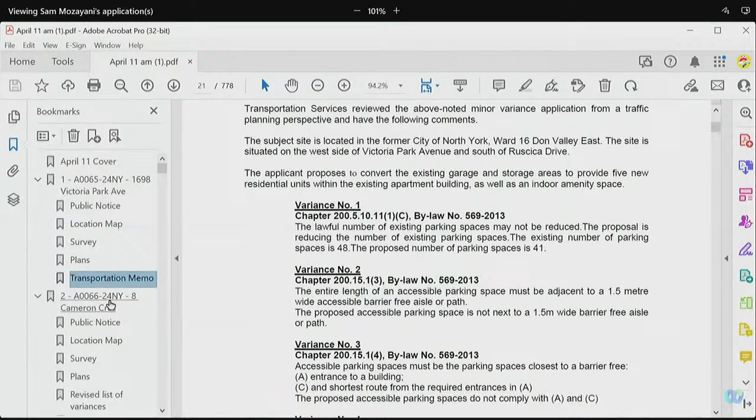Mr. Chair, we're having an issue reaching the agent at this time. If you wouldn't mind, why don't we move on to the next item? Okay, so we're going to hold item number 1. Let's move on to the second deferral request, 252 Florence Avenue.

Through you, Mr. Chair, that's in the afternoon. Do we want to leave that to the afternoon? Okay, so let's move on to item number 2.

8 Cameron Crescent. Give me a moment here.

The purpose of the application is a proposal to add a 2-story addition, deck, and make alterations to the existing detached dwelling. We've got variances for side yard setback for a covered front porch, driveway width, front door height, lot coverage, building length, FSI, east and west side yard setbacks, eave projection, building height, side exterior main wall height, front yard landscaping, front yard soft landscaping, and vehicular entrance height.

On file, I have material from the applicant as well as a memorandum from transportation and a staff report from community planning. Do we have the applicant with us?

Good morning, Mr. Chair. Good morning, Members. I'm Evangelista on behalf of 8 Cameron, 53 Bentworth Avenue.

Thank you. Staff, can you hear the agent? If you can just speak up a little bit for us. Oh, sure, no problem. Just give me 1 sec. Thank you. Is that better? That's better.

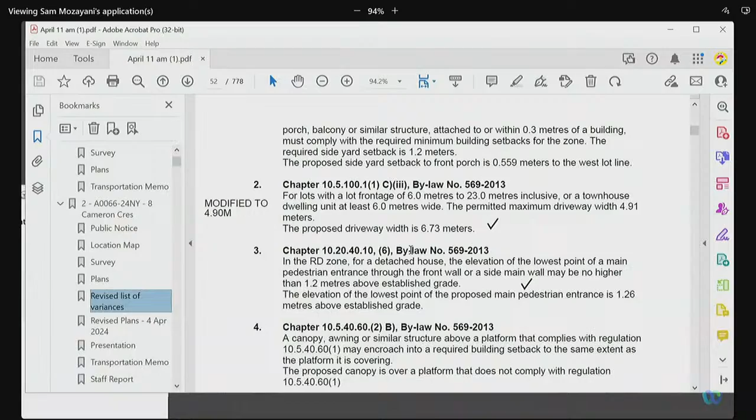The next variance that we have amended is variance number 12. We've amended that to 7.45. We did a further amendment - I believe the modified list that you have states 7.50, however, in further discussion with planning, we have amended it to 7.45. Variance number 13, we have increased the front yard landscaping to 46.74%.

Okay, variance number 14 has been removed as we now comply. Variance number 15, Mr. Chair. Yes, which doesn't seem to match what we have on the screen. I just want to clarify that we are noting the correct variances.

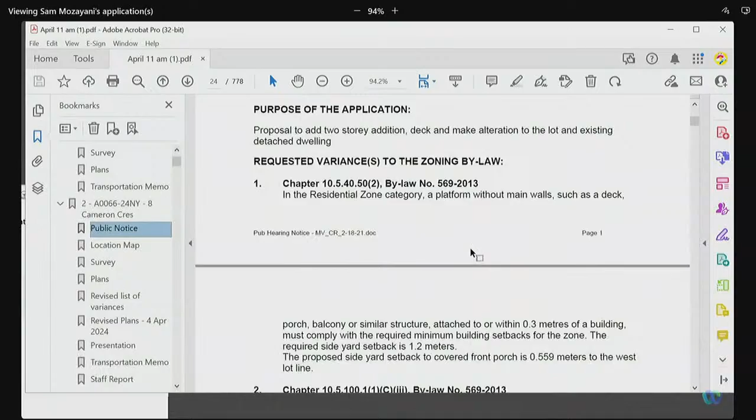I believe variance number 12 is your specific concern, I'm assuming. So variance 12, I believe is not 7.5, and I'll have the agent confirm, but I believe the modification is, if I heard correctly, 7.45. You are correct, Mr. Chair.

Okay, and I believe, sorry, you're saying variance number 14 has been removed. Sorry Mr. Chair, can I just have them repeat what is the change to variance 12? 7.45 meters.

Am I looking at landscaping? Which is consistent with the planning comments in the staff report. We're just going to bring up on the screen variance 12, which we have as landscaping.

Why does my public hearing notice differ? Let's just take a minute to see if we can identify the discrepancy here.

Can I, through you Mr. Chair, to staff, to Simon - the modified planning notice that I submitted - through you Mr. Chair, we can only use the public notice that was mailed when we go through changes. That's the only one we should be using as reference.

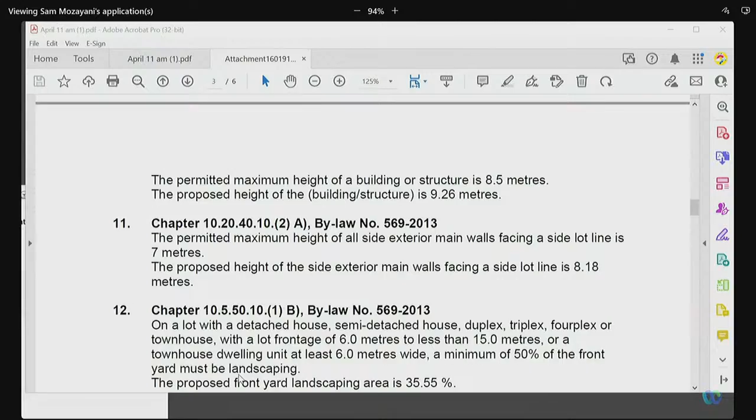2400, 2430, 2434, 2440, and 2444 Yonge Street, as well as 35 Roselawn Avenue. The purpose of the application is to alter the development standards as approved by the site-specific zoning bylaw 1207-2022, including changes to the tower heights, gross floor area, and parking space lengths. The southern tower will increase from 101.2 meters to 110.1 meters, and the north tower will increase from 83.2 meters to 92.1 meters. Variances include FSI, height, and the minimum length required for up to 4 parking spaces.

On file I have materials from the applicant, comments from HPS, a memo from Engineering and Construction Services, and a letter from the local councillor. I also have a late staff report from Community Planning. Do we have the agent with us?

Mr. Chair, my name is Michael Goldberg. I'm the planning consultant for the applicant. Okay, Mr. Goldberg, and your address? Goldberg Group, 2098 Avenue Road, Toronto, M5M4A8.

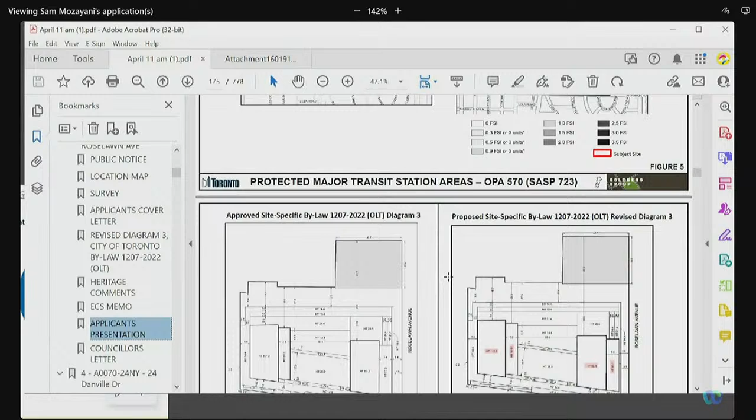If you look on page 7 of my presentation, that drawing is attached on the right-hand side, but it is on file with the committee as well. So if you go to page 7 of the report, on the right-hand side, in the bottom left-hand corner, it's dated January 26, 2024. That is the request we have attached to your decision.

Okay, and you're aware of the staff report from Community Planning? Yes, sir. I've read both community planning, the transportation, the local councillor, the next door neighbor, and we understand that the Ratepayer Association is also happy with this application.

I also see some correspondence from Engineering Construction Services. I see no further comment in their notes. I'll have to just mention to my colleagues whether or not there's any specific condition that they may require. Yeah, it seems like they're satisfied. If there's nothing else to discuss, we don't have any other questions. I see no other questions.

We are ready to move this into committee. Yes, and I do note the late staff report from Community Planning. Any discussion, comment, motion?

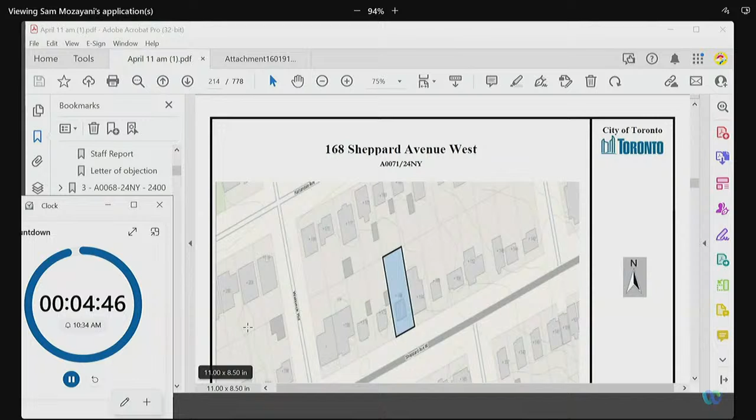Yeah, I have one thing. I would like to make sure of the veterinary use for the property. Basically zoning bylaw 7625 says that veterinary clinic means professional office as the definition of veterinary clinic. The zoning bylaw also says veterinary clinic operated by someone licensed under the Veterinarians Act. What if we don't have a boarding kennel in the clinic, only providing medical care to animals? I just want to know if it's possible.

Are you asking a question? Can you repeat the question for us? What if we remove the boarding kennel in the proposed clinic, and only provide medical care to animals? So my understanding is you disagree with the comments in the staff report?

Just one thing, and for the second floor, I will change it from residential use to the permitted other use. Do you have any questions? I just want to know, the veterinary clinic won't have any boarding kennel, but in this case can we approve the zoning bylaw? So if I understand correctly, you're putting forth that because it's not being used as a kennel for overnight boarding, you think the use will not impact the particular allowable zoning.

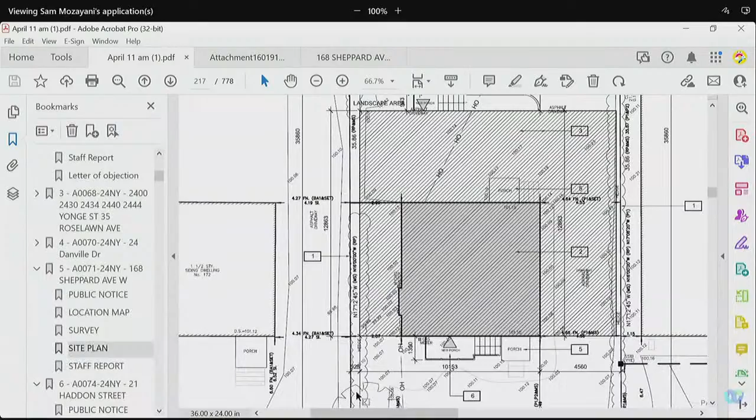So you've heard the agent speak on behalf of your neighbors. I'm going to turn it back to you and provide you an opportunity to comment on some of the things that he's put forward. Is there anything you'd like to add? No, I haven't. Okay, anything else? That's fine. Do we have any questions? Any additional questions before we head into committee?

No, I was wondering - I really wanted to hear what the applicant would reply to the opposition, but... Are there any specific questions you'd like to have the applicant elaborate on? I want to also make sure there's enough communication back and forth that everybody understands. Thank you, Mr. Chair. I wanted the applicant to comment in terms of the staff report - I understand there was conversation about the argument that a medical office is there. But in terms of the zoning bylaw, like the opposition mentioned, I'd like to hear this from the applicant, though it's up to the applicant if they want to reply.

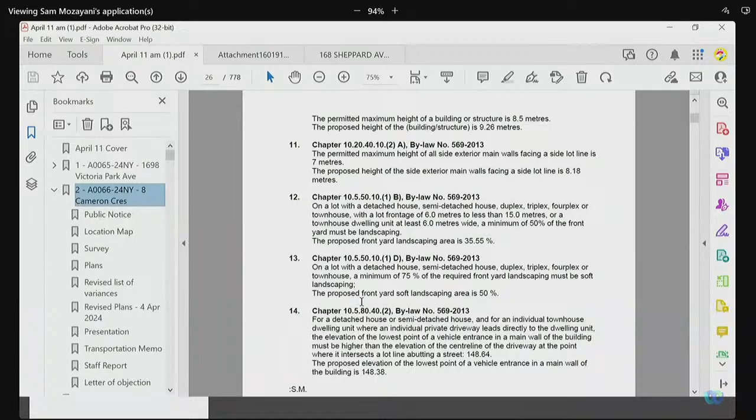So now variance number 2 has been removed. Okay, thank you. Just for the driveway width, if you can just read it, so we make sure we've got the right variances — for the driveway width, we're removing it.

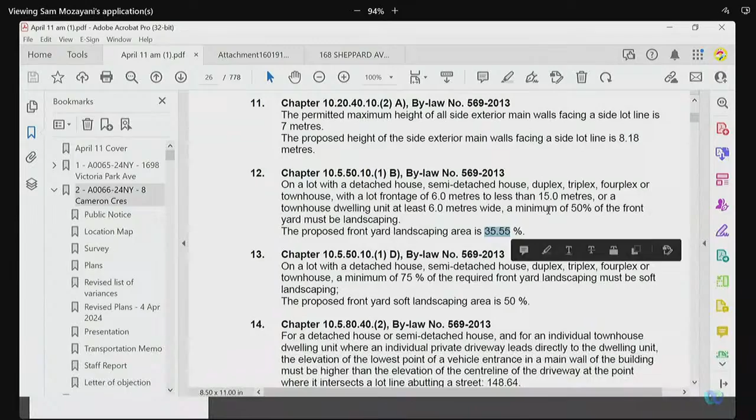Correct. Then let's move on to variance number 11, the proposed sidewall main height is now 7.45 meters. Okay. Variance number 12, the proposed front yard landscaping area increased to 46.74%. Is that correct? Correct. Okay, thank you.

Variance number 13, proposed front yard soft landscaping — that variance has been removed. Okay, very good. Variance number 14, the proposed elevation of the lowest point of a vehicle entrance, also removed. Okay, very good.

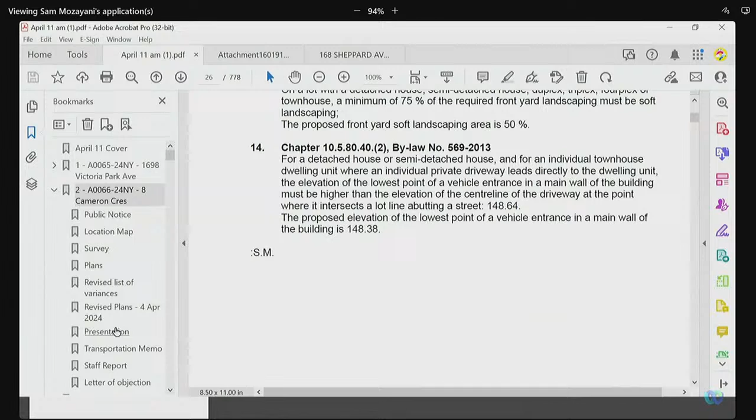We got those amendments? Yep. Okay, thank you very much. Okay, great, just give us a moment. I'm going to ask my colleagues if they require a presentation from you at this time. But we do have speakers, so perhaps a brief presentation would be appropriate.

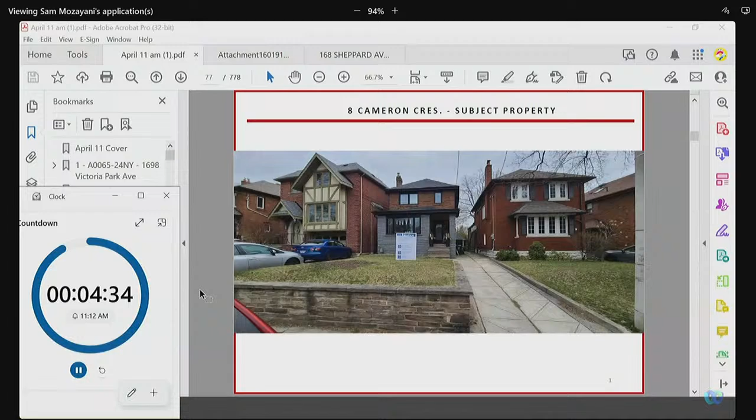So the subject property that you have in front of you, the west wall will be remaining. What the owners are proposing to do is an addition at the rear and at the side of the home. The comments made by Transportation no longer apply, as we have removed those 2 variances that they referred to. We do have a side yard setback on the west side, which is existing, and we've actually bumped the house in at the back where we're proposing our addition, which in some points is 0.91 meters, opening up to approximately 1.23 on the west side.

On the east side, we also have a side yard setback, with pinch points along that east wall. However, there are areas where it does open up to 1.19 meters, just shy of the permitted 1.20 meters. So let's talk about coverage — for this particular house, we are asking for a coverage of 39%, which includes the rear deck area, but the house itself is approximately 36%, which I believe is not far off from the 35% lot area.

And as I mentioned, it relates to the other areas at the front of the house, the porch, and the deck at the back. Our building length has been taken from that front canopy to the rear yard.

As you see, if you refer to my submission, page number 3, where I've outlined all the variances relating to the side yard setback to the front porch, the setbacks on the west side and east side, and the length of the dwelling.

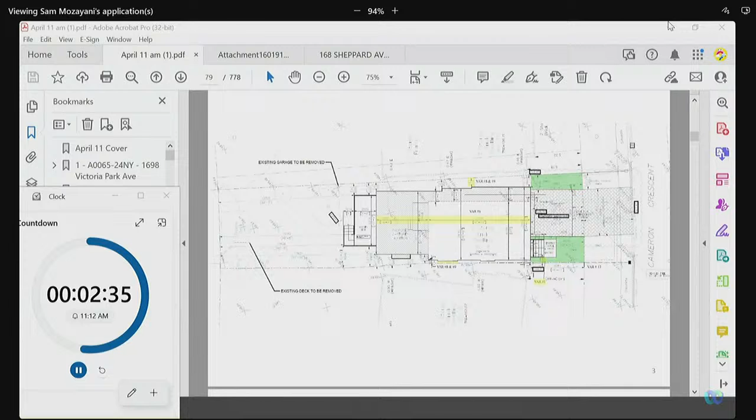We have reduced the main wall height to 7.45 meters, which is more in keeping with what is existing in the neighborhood. Our landscaping has been increased.

This does not differ from what we currently have, because as I mentioned, we are altering the home that is currently there. We've worked quite closely with planning staff to make the changes, and they are amenable to them.

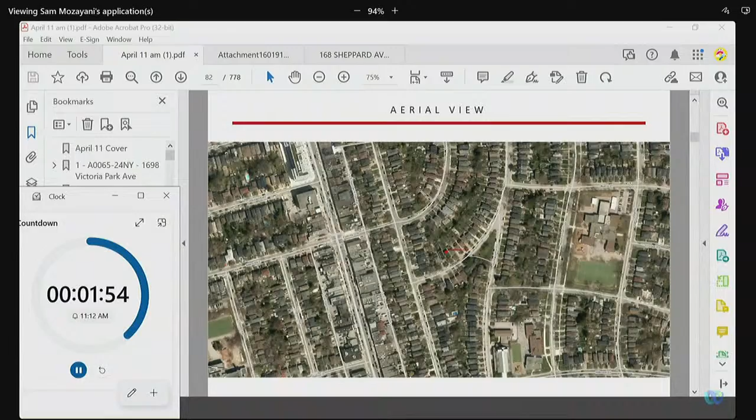I am in receipt of the Leaside Residents Association letter. They make a reference to the large tree which is in front of the garage at the back. I'd like to add that that tree is 0.22 in diameter. It will remain, as the garage is slab on grade, so it will not be affecting the roots.

If we refer to the site plan, you'll also note that the tree canopy is nowhere near where the construction of the home is, and the deck will be on sonotubes. So again, it will not be affecting the tree in front of the garage.

Other comments that they've made reference to, we have now revised. So I submit that this is truly a form of intensification. It's very characteristic of other homes in the neighborhood.

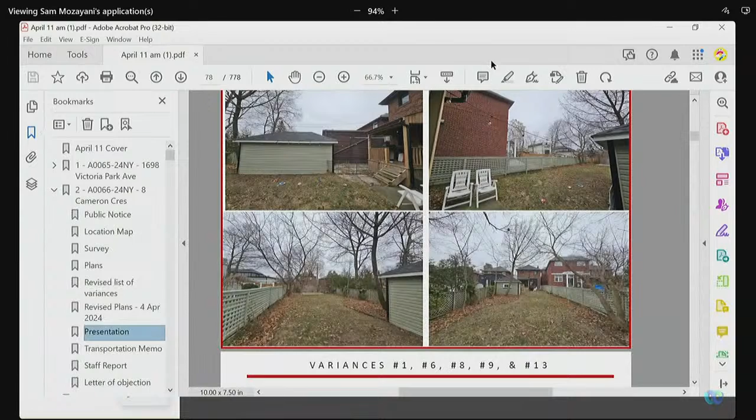I would also like to add that the owners did speak to 6, 10, 3, 5, 7, and 9 Cameron, who are all in support, some of which we received letters of support from, albeit late submission, but we did receive letters of support. I'm open to any questions you may have.

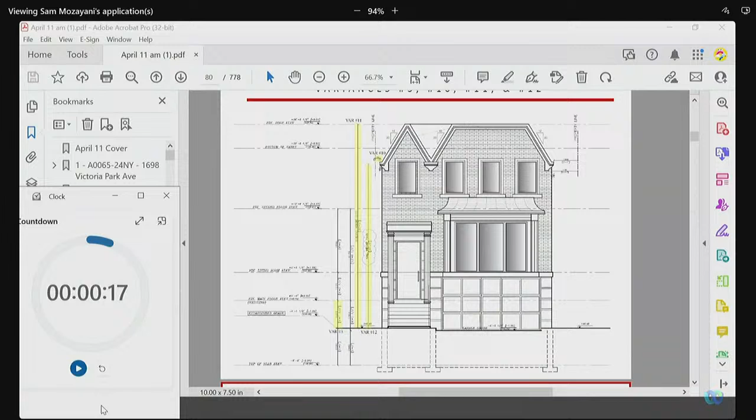Well, we've brought down the main wall height, and that just allows for a little additional height on the overall height. Having the additional overall height allows for a higher ceiling height in the second floor, at 8.5 feet.

And our floor heights are not excessive. We are asking for 9-foot ceilings, and I believe the upper level is 8.5 feet in height. That just allows us to have that full height in the upper level, bringing the main wall height down.

Through you, Mr. Chair, with this proposed height that we are talking about, can you elaborate how it fits within the community there, and also how is it minor?

Through you, Mr. Chair, my apologies. I'm sorry, I missed that. Can you elaborate how this satisfies the test of minor, and also how it fits within the community?

Well, as you know, as I did say, I talked very closely with planning. There is a diversity in heights in this area, ranging from 8 meters for flat roofs, 8.5 and 9 meters, and 9.5 meters. So this is very consistent with what is in the neighborhood.

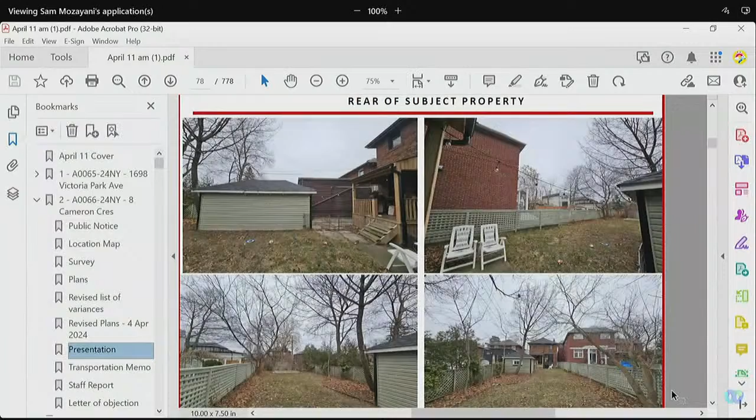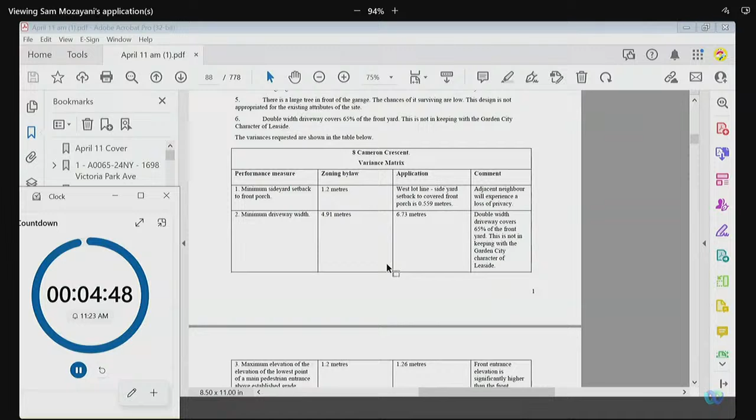I've been listening and watching the proceedings this morning and the confusion that's been going on. As indicated by the applicant and their agent, there have been some changes made to the application, which from our perspective are being made on the fly without information available to the public or the neighbors. But anyway, the changes are certainly an improvement.

One of the issues was the lot coverage and the front yard landscaping, which are very sensitive issues - we want to preserve the greenscape and the trees. The improvement from 35% back to 46% in front yard landscaping is certainly appreciated. We'd like to see no variance at all, but it's better than it was.

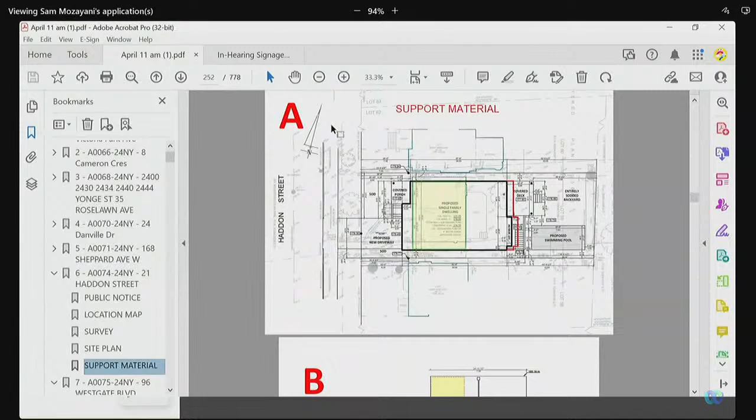Sure. We have submitted some material in support. We're asking for increasing the floor area from 0.6 to 0.8. This is very commonly precedented in the neighborhood, whether for new houses or renovations, numbers a lot higher are precedented. In this case, we needed just 0.8.

That's what we're asking. The front yard variance also is helping us to put the building between the two neighboring houses. If we had to comply with the front yard, you have that graph on screen. The red line is showing the rear wall of the house as of right, which would be in angle of view for the neighbor on the north, and also creating additional visible wall for the neighbor on the south. So we believe this is appropriate and everybody is going to benefit from it.

In addition to that, we're asking for the wall height. Currently 70% of the side walls can be up to 8.5 meters. Now we're asking for 50%. I have a graph, another graph, I think it's exhibit B or C. That highlighted yellow area is where the wall height, additional wall height, we need.

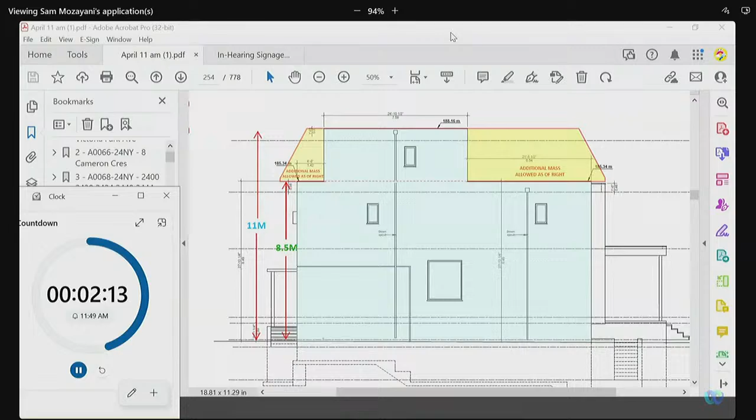Thank you. Okay, thank you. Any questions? Seeing as there's no questions, I believe we have another speaker.

Hello, can you hear me? We can hear you. If you can state your name and address for us, please, sir. Thank you. My name is Rick Klestenik, and I'm at 17 Haddon Street, and I'm the neighbor adjacent on the south side of the applicant's property. So the reason for my participation today is to discuss some issues or concerns I have with respect to drainage.

The previous owner, at some point about a year and a half ago, made some modifications to their driveway and inadvertently created a situation where there was water running basically from their existing garage all the way down the driveway and into my basement. So after some collaboration with my neighbor, we jointly repaved the area, and I repaved the entire section along the side of my house to ensure proper drainage.

So going forward through construction, my request is that the applicant be very sensitive with respect to drainage during construction, to minimize any damage to the driveway or the paved section on my property, so as to minimize the risk of any water running into my basement.

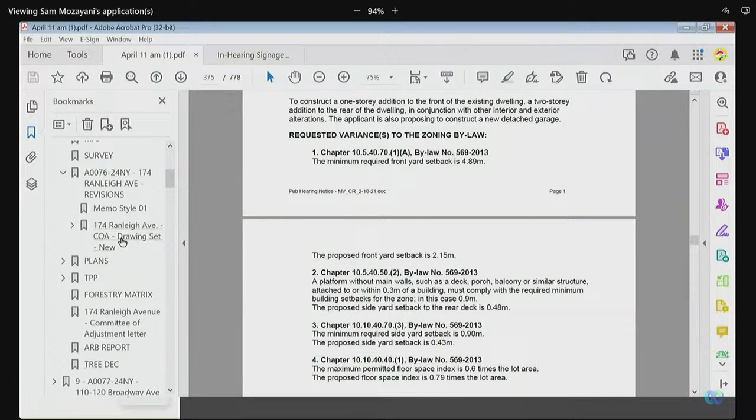Variances number 2 and 3 are for side yard setbacks. These are triggered by aligning the rear addition and the deck with the existing non-conforming setback of the house. The existing house also has a setback of 0.43 meters from the side yard.

Variance number 4 is for an FSI of 0.79. This reflects the narrow lot, which requires 3 bedrooms on the second floor to be laid out linearly. 2 of the bedrooms are less than 10 by 10 feet in size, and the total area of the house after the proposed additions would be only 120 square meters, which is not a large house.

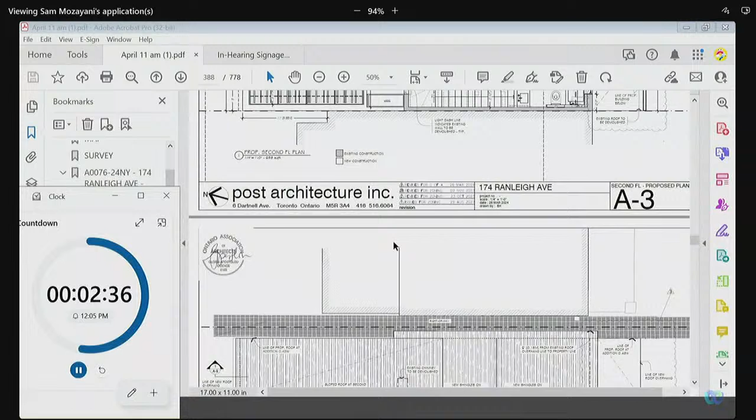The owner has been in contact with the immediate neighbors on either side, and they support the proposed additions. She has also spoken with the neighbor to the rear of the property, who was concerned about access over the rear laneway. We have submitted a copy of our deed as well as the deed of the concerned neighbor, and it clarifies that access to the right-of-way is noted and included for both of these properties.

There are 3 properties along Ranleigh that have access over the right-of-way. We understand that the neighbor submitted their letter of concern prior to the conversation and the clarification about the right-of-way, but they are now satisfied with this as well.

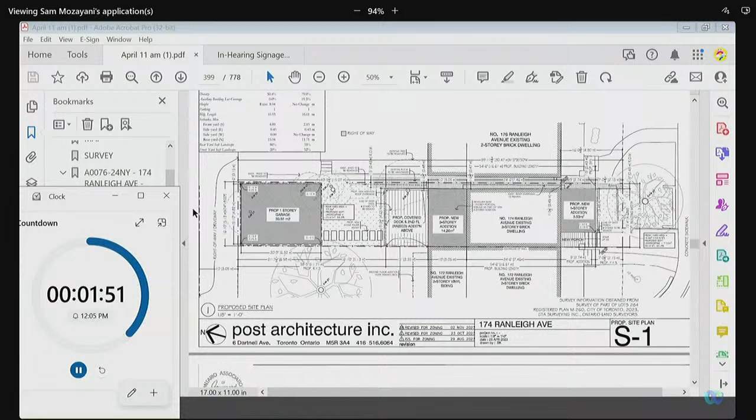We also understand that urban forestry would like us to apply for a permit to remove the trees at the rear, and we're happy to comply with that or alternate planting or whatever they may request. Thank you, we're open to any questions.

Okay, any questions? Okay, no, if there's no questions, I believe we have another speaker.

Good morning, Mr. Purchase. I'm just here to listen in. Ah, very good. Okay, thank you.

All right, let's take it back to the applicant for a moment. Seeing we don't have any other questions, okay, if there's no other questions or comments at this time, we can move into committee.

Through you, Mr. Chair, if no one has any comments, I'd like to forward a motion to approve this application as revised. I think variance number 1 revised to 3.01, with the condition of forestry number 1. I believe the application satisfies the 4 test, therefore this is the reason for my decision.

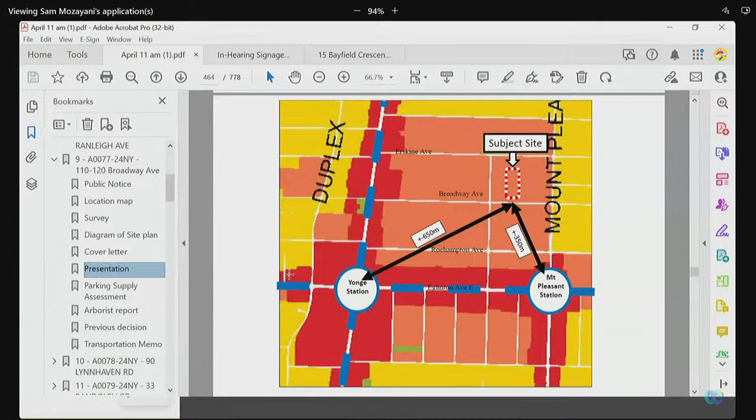The variance, and chronologically, figure 4 of our presentation may be the most helpful. We've got some slides that show you where the site is. It's got great proximity to transit, Yonge and Eglinton, and also the LRT station at Mount Pleasant. It's had an approval that goes back to an LPAT approval in 2019.

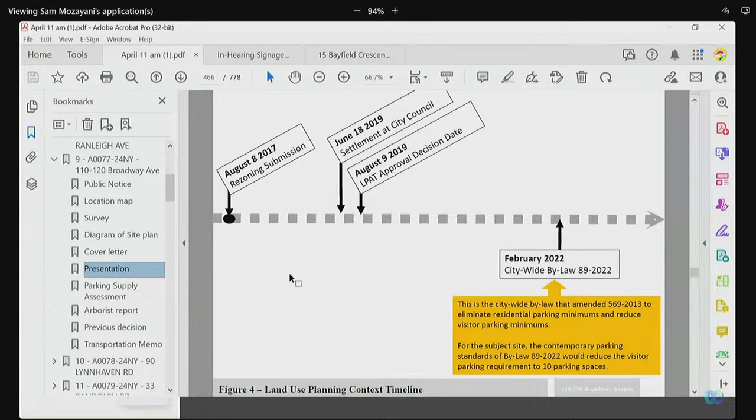The intervening step is February 2022, when City Council adopted new parking standards on a citywide basis. That's bylaw 89, 2022. So if we were submitting this today as a new rezoning application, we would actually not have to seek the relief that I'm seeking from you. We're simply looking to implement the visitor parking standard that's in bylaw 89, 2022.

So why I say the memo from Transportation Services is a bit puzzling: they're asking us to study something that's already been studied, that's been recommended by the city's transportation department, and that has been adopted by City Council. So BA Group, and I don't mean to throw transportation staff under the bus, there is very good transit service in this area.

BA Group has reached out to them 5 times since we saw that memo with phone calls. They have not called Alan Lloyd at BA Group back to have a discussion, so I can only speculate. I don't know whether they think we're going for a lower visitor standard than bylaw 89, 2022, which is why they want some type of site utilization study. But frankly, the project's under construction, we can't even do a site utilization study because the project's under construction.

If we did a site utilization study, it would track the number of construction vehicles coming in and off the site. It wouldn't track the use of visitor parking. So the deferral they're requesting to do that study could be for a year. It's really prejudicial, so we're hopeful the committee can just proceed with it today. We're hopeful the committee can see the logic that we're just implementing the council approved standard, and that if we were doing this application today as opposed to the approval from 3 years ago, this would be the as-of-right standard and we wouldn't have to seek any site specific relief.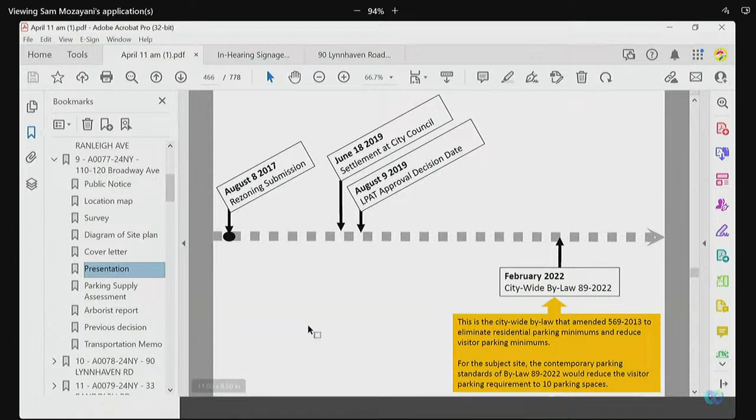I'm going to ask for a brief presentation from you at this time. Sure, I did submit essentially what I would be discussing, so I can go through that briefly. I will note we do have a letter of support from our neighbor at number 92, which is our most affected neighbor, our longest length is on that side. There's also a proposal behind this property, so we don't have a rear neighbor - it's an actual grassy area for the new site plan for the development that's behind them.

So if we go through the list of variances, variance number 1 refers to the front yard setback, which is actually referring just to the garage portion, which is 1 story. The rest of the front yard setback is 8.43 meters, so that's only really for a moment in the front elevation. In terms of our driveway, again this is very minor and often asked and granted - we're about 6 inches wider than what we're allowed to be, so I wouldn't focus there.

Variance number 3 is for a minimum rear yard setback. We have revised that per the staff report to 7.07 meters, and that's to the furthest point. If you refer to the site plan, that's to the furthest 1-story portion of our proposal, which is the breakfast area. The rest of the house, which is 2 stories, is set back 9.23 meters from our rear yard, so it's slightly more than what's required.

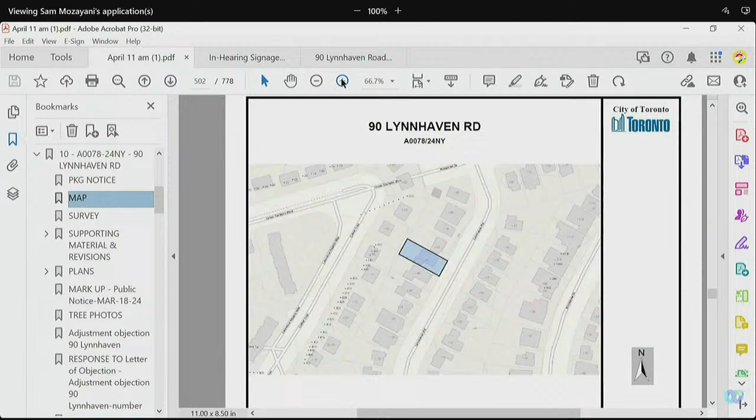So things that are being developed are definitely being developed with these numbers in mind, and having staff support shows that this is in keeping with what's being developed in the neighborhood. Okay, thank you very much. Yes, that answers my question. Any other questions?

Okay, seeing as there are no additional questions and no more speakers, we will take this into committee. Thank you very much.

Mr. Chair, I'm prepared to move a motion for approval of the application as amended, subject to the condition in the planning staff report that the property be developed substantially in accordance with the revised site plan. I think that by tying this condition to the property, it controls the location and extent of the building length and depth, and that satisfies my concern with that variance. I think the application is minor and desirable for the neighborhood, and meets the intent of the zoning and official plan. Okay, do I have a seconder?

Yeah, I second that. Okay, seconded by Mr. Fazeli, all in favor? Okay. The motion carries, the application is approved. Thank you very much, have a good day.

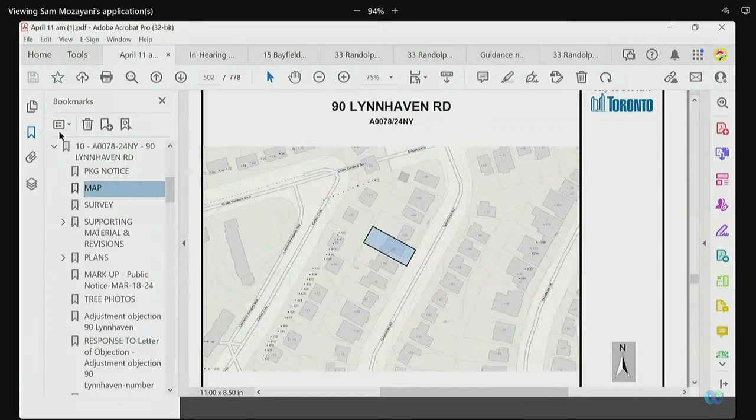Mr. Benkowski, before you go any further, let's go through the notice. Just so staff can make note of what is being modified with this application. I believe it's labeled zoning waiver that we submitted last evening. Let's go off the public notice. Absolutely, it coincides with it. Okay, fantastic.

So variance number 1—through you, Mr. Chair, I just want to make sure we have two variances numbered one: one is for a dwelling, one is for the garden suite. Sure, let's do the dwelling first. Thank you. So variance number 1 for the dwelling has been removed.

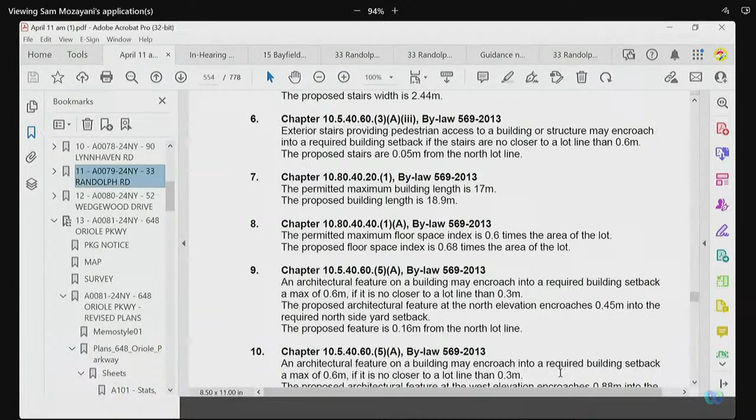Variance number 3 for the dwelling has been removed. Variance number 5 for the dwelling has been removed. Variance number 8 for the dwelling has been removed. My apologies—variance number 9 for the dwelling has been removed. And variance number 10—number 8 has, number not 8 been—number 8 remains, Mr. Chair. Okay, and you said now variance number 10 has also been removed. Okay.

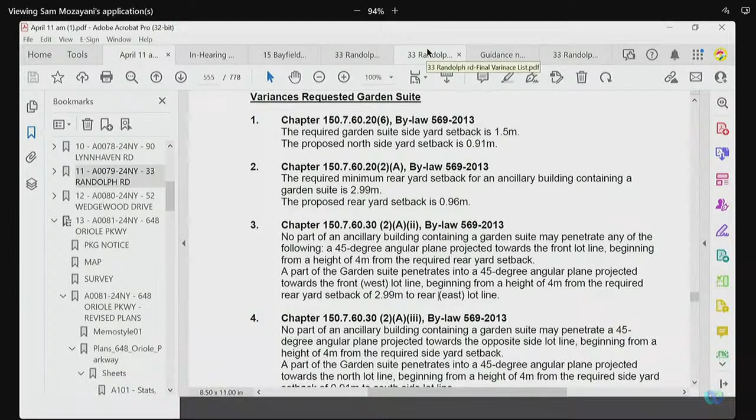So in essence, we've gone from 10 to 5 variances by essentially eliminating the architectural features as well as the balcony. In terms of the variance requested for the garden suite, this coincides with the staff report that you received, which deals with the setback to the rear being 1.87 meters. That is variance number 2. We have also submitted revised plans that indicate this. Variance number 2 for the garden suite has been increased to 1.87 meters. Through you, Mr. Chair, that would coincide with the recommendation of staff from the staff report. Just to clarify, that's concerning the rear yard setback. Correct. Okay, thank you.

So those plans have also been filed with the committee. Very good. All right, the floor is yours.

Okay, a couple of things. I'd like to bring up the survey first to give a little context to the size of the lot itself, in terms of Leaside, what the prevailing lot size would be. This one is very narrow but deeper than the average lot in the Leaside area. The frontage here is essentially 7.93 meters at the rear. At the front it does bow out a little bit, but only for a very small portion of the property. So that 7.93 meters is a reduced frontage from what the typical Leaside lot would be, but it has a 46.36 meter depth.

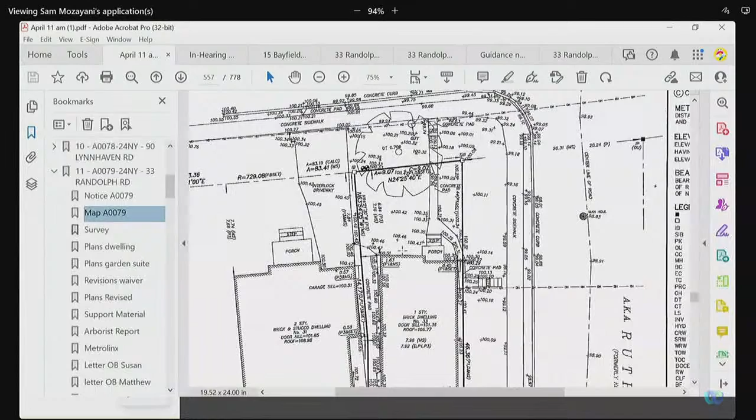Now that coincides with two parts of the variances I want to cover. One is the proposed building length—the ability of a deeper lot to handle somewhat of a deeper building on it, as we examine the context of the zoning bylaw and how we envision setbacks and building lengths. That's really situated on a 100-foot lot, being a 6-meter front yard setback, a 17-meter house, and a 7.5-meter rear yard setback. That is essentially the built form we look for to achieve on a 100-foot lot. When we look at the property here, we have a 46.36 meter lot.

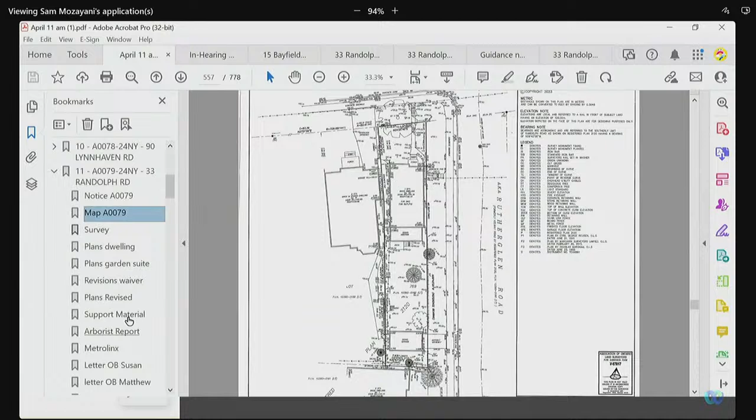To examine the situation with the house to the west and to the east, that again is a sidewall-to-sidewall situation. If we could bring up my supporting material and how that relates to the impact on the adjacent dwelling on Rutherglen, I included a couple of photos of really what that situation looks like.

The existing side yard setback of the dwelling on Rutherglen is 0.6 meters. Taking our additional 1.87 meters that we've proposed, there is now a 2.47 meter separation from the side wall of the dwelling on Rutherglen to essentially the rear wall of our proposed garden suite, but again, essentially creating a sidewall-to-sidewall separation rather than that typical garden suite situation where a rear yard and a rear yard are touching.

Again, there are no windows along that side of the Rutherglen dwelling that exists there today, again reducing any type of impact or loss of privacy, overlook, or shadowing that might occur into that dwelling to the north. I'd also like to just briefly touch on the zoning.

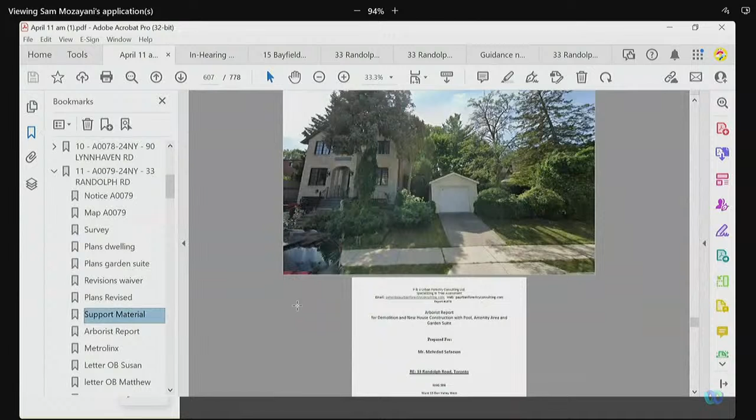This has an RM zoning. That RM zoning envisions intensity. It predates even the multiplex bylaw allowing 2, 3, and 4 units within that RM zoning itself. So even predating the multiplex, this is a portion of Leaside that has a mix of semi-detached dwellings.

As we go to the north on Randolph, we actually have two mid-rise buildings up as we get towards McRae.

Speaking to how we sited the house, the dwelling to the north on the side yard setback is actually a slight improvement over what exists on the property today. So we have moved the dwelling a little bit further away from Rutherglen.

The variance for the side yard stair access, again, is an improvement, as the side yard stairs today actually sit on the city boulevard on Rutherglen. We are proposing them, again, within the property.

We are expanding the setback to the south, a little bit closer to the adjacent house to the south. But again, that dwelling today has a 0.57 meter side yard setback.

Again, if we look at the setbacks that exist even on the property, and we know the dwelling to the south, and we know the dwelling on Rutherglen has a 0.6 meter setback, this really is kind of in keeping with what sits there today. Okay, so we're not introducing a setback that doesn't exist already on the property today.

Lastly, two other things to touch on. We are below the coverage of 35%; we are at 33.33%. Again, when we look at the increase in building length and the reduction in the side yard, that is the indication of the increase in building length and the ability of that increase in lot depth. That increase in lot depth really is an indication of the property being able to accommodate the increase in building depth we are proposing.

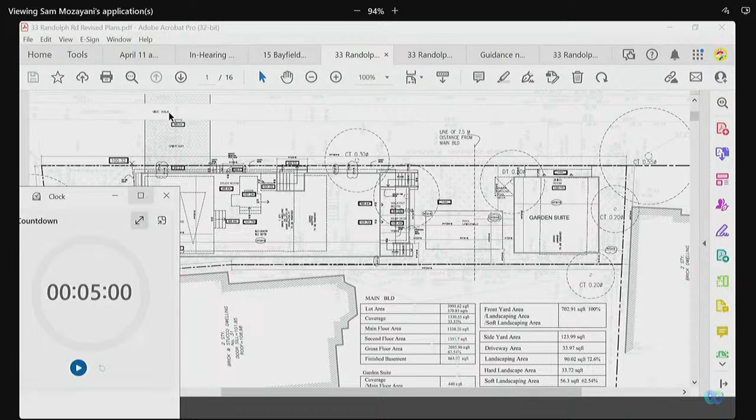Welcome. I would like to respectfully request a slight extension because both of us applied to speak and were told we could share the time, so we prepared a 10-minute presentation with a lot of points to make. I'll try to cut down as much as I can, but could I get a few minutes extension? We can only offer 5 minutes. Please try your best - if we have questions, that may provide an opportunity for you to elaborate, but please try to stick within the 5-minute allotment for procedural fairness.

Okay, and the kind gentleman or lady helping might need to roll the presentation as I go, since I won't have time to. Please remind you to speak into the mic so members can hear. Can you hear me? Can we pull up the presentation? Let us know when you're ready. Oh sorry, this is not the slide. Okay, right, so we don't have visual - I'll just read everything out then. Please do. Just to let you know, we've reviewed the file extensively and are very familiar with the application, so if any questions come up through your presentation, we will certainly ask.

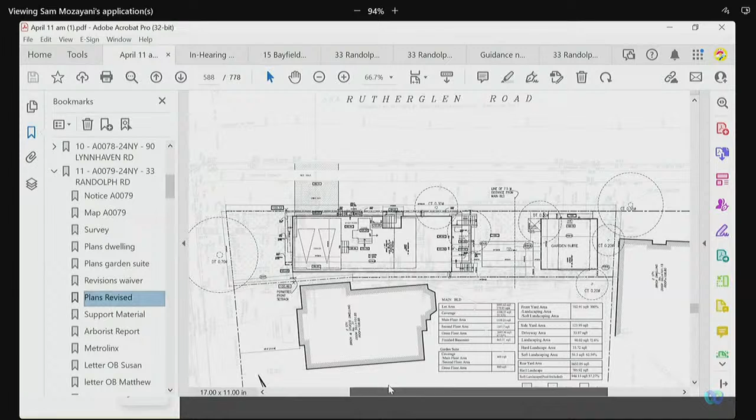Some of the critical non-compliances have been identified as follows: public safety risks, traffic and pedestrian hazards. The garage is located directly next to a busy crosswalk. This is dangerous, especially to school children and parents walking to and from school, which is down the road. Vehicles and pedestrians coming from Randolph Road are not able to see vehicles reversing out from the proposed garage, and drivers reversing from the garage cannot see them either. This is in violation of safety-related laws, including sightline obstructions.

Fire hazard: building code states that a building wall less than 1 meter from the border is a fire hazard. The garden suite has deficient setbacks in all directions. According to the fire expert, fire safety requirements cannot be overridden by minor variances. Another serious issue is there's no fire hydrant on Rutherglen Road - the closest one is 80 meters away, but the garden suite must be located within 45 meters of a fire hydrant. In addition, the building is made of stucco, which is unsightly and not as safe as bricks. That's why the applicant should follow the Leaside Guide and use materials like bricks and stones.

The proposed garden suite is a motel and therefore requires commercial zoning. The definition of a motel is a roadside hotel with parking directly outside. This garden suite is unique as it has the option to operate as a standalone motel. It fits the definition perfectly because it has street parking available directly outside with its own entrance, directly accessible from the street without going through the main dwelling. Garden suites are supposed to be in an enclosed backyard, not accessible directly from the street, and a garden suite that is a motel in every sense will require commercial zoning.

The garden suite is visible next to the street, unlawfully blocking the street view of the adjacent neighbor by more than 100% of both height and street view angle. There's no law to support putting a 2-story dwelling next to the front yard of the adjacent neighbor. The garden suite will also destroy all trees and an award-winning garden, as well as causing a spike in traffic and parking congestion. Furthermore, it's too small - the lot is too small to accommodate the garden suite. These are the reasons why the garden suite must be rejected.

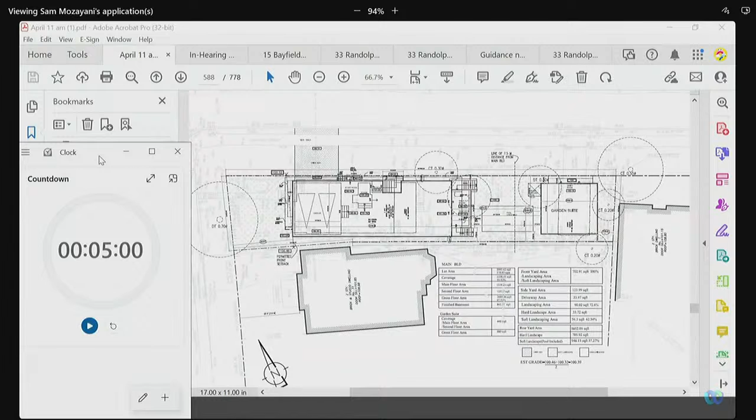I don't think what they're asking for meets the intent of the bylaw, and it isn't desirable by the neighborhood. It does front onto Rutherglen Road, which leads me to suggest that it's an actual dwelling. For instance, if you look at properties throughout the city, 383 Shuter Street, if you remove the top floor, it's about the same size, and that's a full-blown residence. What I'm requesting is that we oppose the building changes and the architecture the agent has presented here, in favor of something else. I'm all for them building a much bigger house, one house, if that's an option, but the 2 split houses, it seems to me that's a full-blown residence.

Within the Leaside community itself, one of the things you notice is there are a number of apartment buildings and condos throughout the area, and many of them have space available. So it's not like we're in dire need of densifying that particular road. That's what I have at the moment, folks. I don't know if there's any questions you have for me.

I do live right across the street from the proposed garden suite, and I do think it would create more of a problem than a benefit to the city and the residents that live around there. I hope that helps. Thank you.

Yeah, and we can see just by approximation, you directly face the garden suite. That's correct? That's correct, yes. Okay, thank you. Any questions?

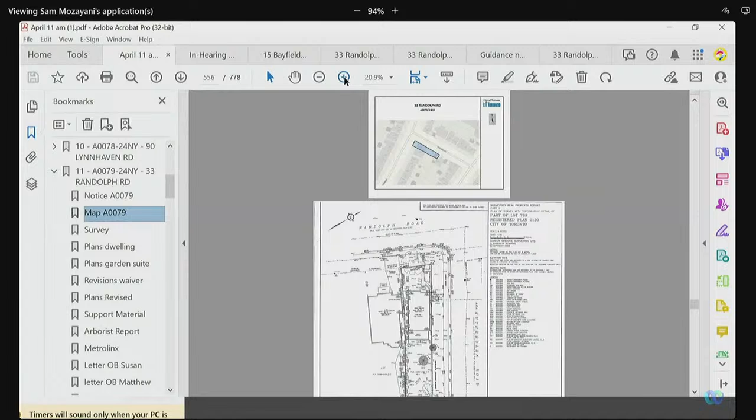And if it's a laneway suite, if they have a fire at that garden suite, or whatever you want to call it, on the second floor in the middle of the night, and I understand that fire trucks are supposed to go to 33 Randolph, the entrance, I can guarantee you that a fire truck is not going to go to 33 Randolph, the front entrance, when the dwelling 40 meters away is fully involved, the second floor. The fire truck is going to go in front of that garden house, or whatever you want to call it, and do their primary attack, everything that they do.

So that is my big question, because as mentioned by my neighbor, the closest fire hydrants to the garden suite are over 45 meters away, and I understand that's supposed to be a requirement. If you want, I have the addresses to where the fire hydrants are.

I don't think it's necessary. Okay, we're specifically dealing with zoning variances, right? And my understanding with respect to the hydrants, there are certain building code requirements that are just not really before us today. Should there be things that come up, like not meeting a requirement of being in proximity to a hydrant, there are other mechanisms in which that can be addressed through. And regardless, even if they get an approval for a garden suite today, if it doesn't meet certain requirements, they will have to deal with those obstacles.

So it's not something that we can deal with today. You're specifically dealing with the Ontario Building Code, is that correct? We're not dealing with the building code, no. You can't, not at all. Maybe that's addressed at the building code phase. When they apply for a permit, I suspect that whoever reviews that application will verify that it meets those building code requirements. It has to go through that review, but we haven't gotten there at this point.

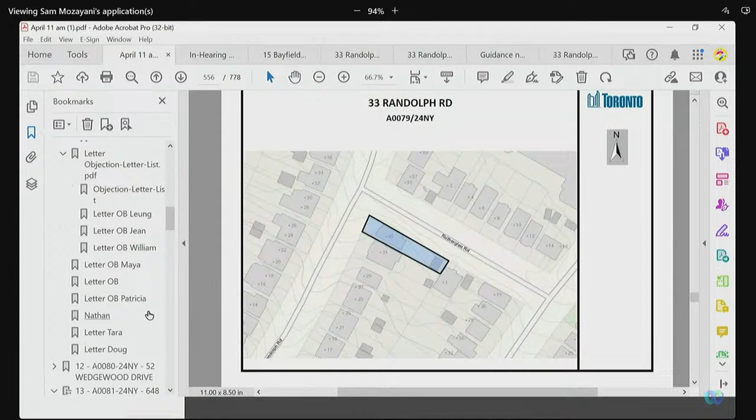So I am the neighbor directly beside the applicant. I'm objecting based off of a few things. Actually, if you could just pull up the plan. I'm not going to bother reading off the sheet since you've already read it.

So I'm objecting based off a few things. The first is really just a question - the distance between our homes is already quite short. So I'm wondering if there's going to be an issue with the sides of both our houses getting weathered and needing repair, but the space not being big enough to fit scaffolding. I guess that affects myself and the applicant, so I'm just curious about that.

The second main objection is around the length of the house. They're asking for 19 or 18.9 meters. The reason I asked to pull this up is you can see my house is angled funny - just the way the properties were set out. But what this essentially does is, at the front of my house there's that bay window, and it would look directly onto 31, or the 33 Randolph, the side of the house, as well as directly onto their deck.

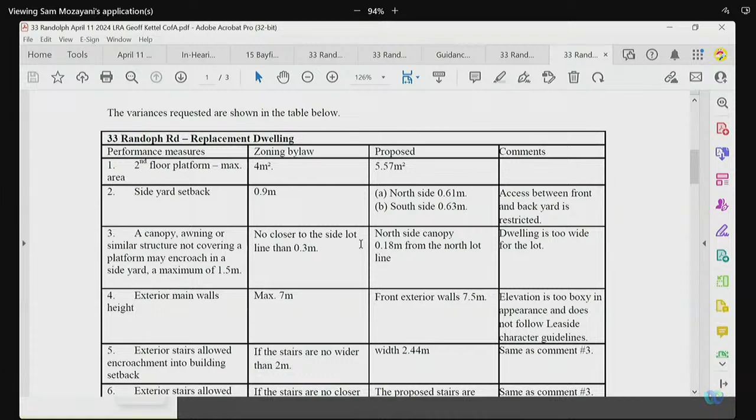The number of variances is excessive. Sorry, I picked up the wrong forms. Yes, there are actually 11 rather than 10 variances for the replacement dwelling. The side yard setback, there's both the north side and the south side - in my book that's 2 variances, not 1. Unfortunately the zoning examiner called it 1, but it's actually 2. So there are 11 variances for the replacement building.

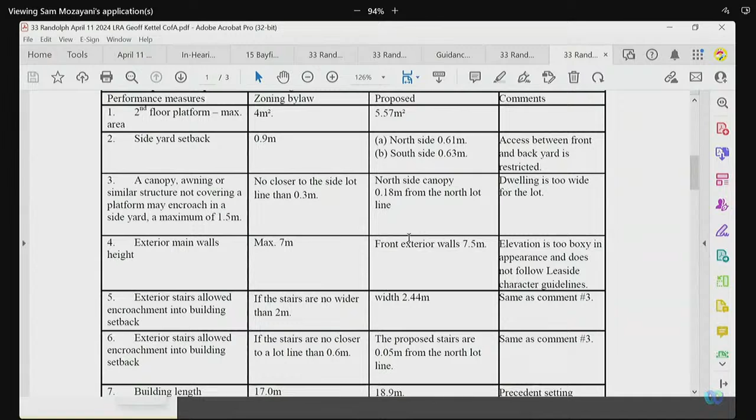And there are some minor changes that the applicant has proposed. They've kind of removed the things that are less to do with volume, just more cosmetic, leaving the substantive variances unchanged.

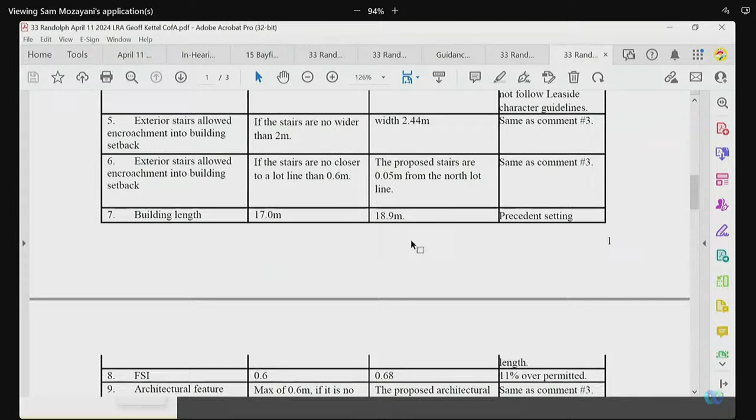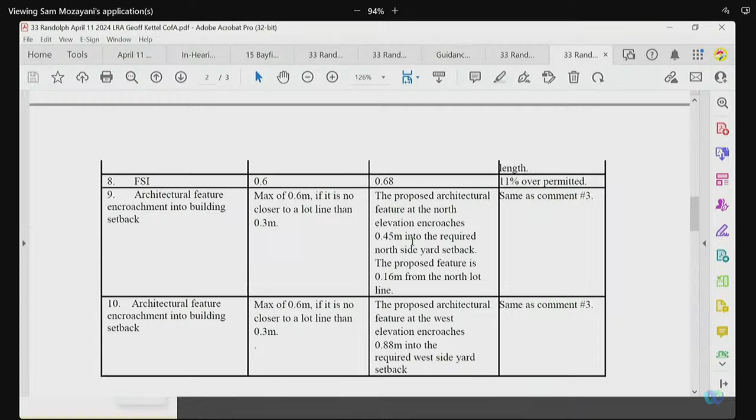Then with the garden suite, this is a new concept, the whole concept of garden suite. In my opinion, my recommendation for you is to simply not approve any variances for garden suites because they're new. We need to understand as a community what they're like, how they work, what the issues are. To go immediately to variances only a year after bringing these things in, when they've not been applied in a real situation - especially myself, I was involved in the discussions around garden suites. There was a lot of negotiation in terms of trying to get a design, a set of performance standards that did not impact on the community.

The angular planes are there for a reason, to lessen the shadowing on adjacent properties. So we really strongly object to this fussing around and removing angular planes and setbacks and so on.

The cumulative impact of the change from the current situation to the proposed situation in terms of hard surface versus soft landscaping - it's been cut by 50%. If you look at the site plan the staff had before you, it's dramatic, the amount of reduction in the soft landscaping. We're really covering up the surface with buildings in a very dramatic way.

So just to reiterate, you've got substantive variances that remain, like the exterior walls, 7.5 meters versus 7 meters. Particularly, as the neighbor mentioned, the building length, 18.9 meters, that's 2 meters greater than the bylaw. The FSI is 0.68, which is 11% over the permitted, and they haven't made any changes except a slight reduction in the rear yard setback, but it's still unacceptable.

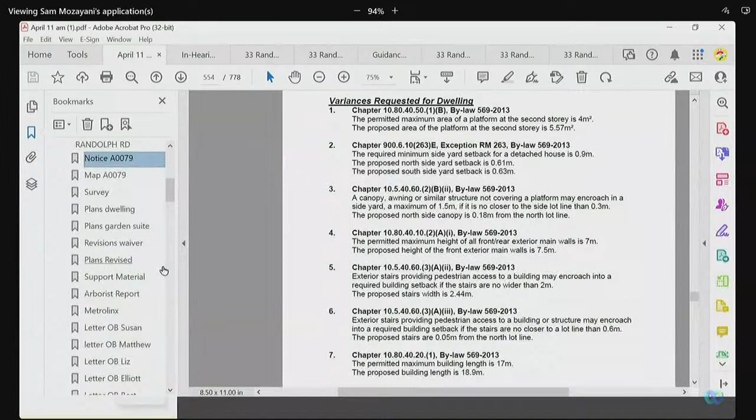We are in excess because of that separation, which goes back to the increased depth that this lot has, which is able to accommodate, in my opinion, a deeper house, leading to a greater separation. If we go into the floor plans and the south elevation, we would see we are well past the actual angular plane requirement that would be there.

The one angular plane requirement that would affect a neighbor, aside from the sidewall to sidewall, is the individual at 1 Rutherglen, who has an elevated first floor as it is. They actually have a full, probably about a 9-foot step on the outside above that integral garage, so essentially they're entering on what would be the second floor of the proposed garden suite. The angular plane in that instance would make no difference at all.

In terms of what fronts Rutherglen, an angular plane fronting the street with a setback behind the proposed dwelling, in my opinion, mitigates that impact itself.

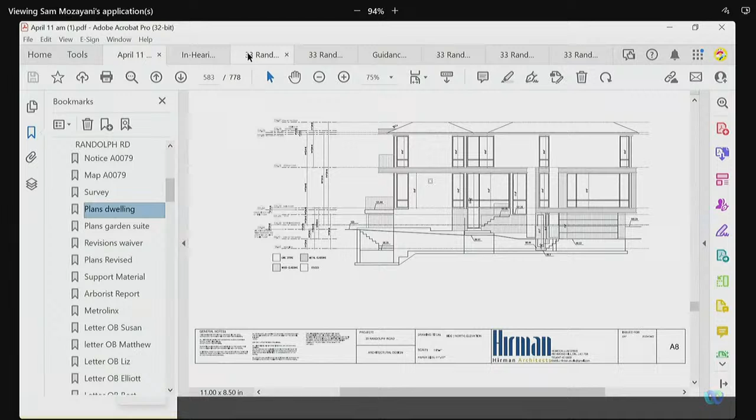The one change I could propose is I could eliminate the angular plane variance to the south to satisfy the resident at number 31 Randolph, which is to the south. He did say that was something that would make him happy. I'm happy to remove that request from the public notice, where we will provide the angular plane to the south, adjacent to the neighbor to the south.

The other interesting point he made, which was a good point, is the sight lines of that dwelling. Because of the nature and the angle of that dwelling, they are always going to have a sight line that looks into number 33 Randolph, just because that bay window is on the angle of the lot.

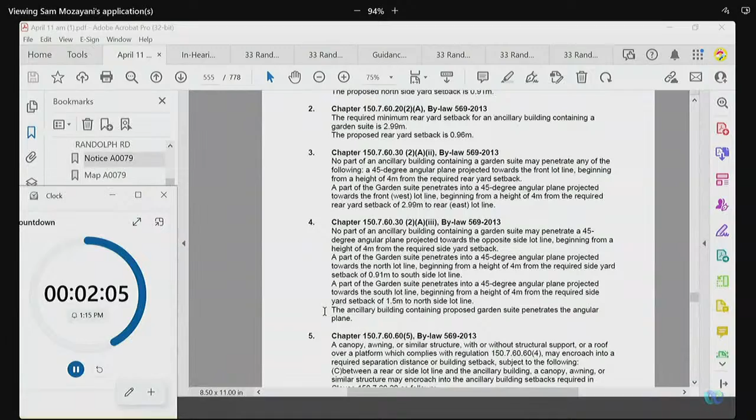In terms of the access to the proposed garden suite, yes, it is a garden suite. It's very specific in the zoning bylaws that were passed whether it's considered a garden suite or a laneway suite. You can't have a laneway and a garden suite both - you can only have a laneway suite when it's accessed by a public lane. It's very clear, so this is a garden suite.

In terms of privacy and overlook, the only windows proposed on the garden suite front Rutherglen. There are no side windows proposed to the neighbors to the east or the south. All windows face Rutherglen in terms of privacy.

There was also a question from 31 about the separation for access. The existing dwelling to the south has a 0.6 meter side yard setback. We're nominally above that from what we're proposing with the dwelling. I'm sure they could come up with an access agreement if they so chose, if something were to happen to either of the houses in the future, but that would be between them.

There was also a question of shadowing from the garden suite. If we want to bring up the site plan or the survey, the way the site is situated, the only shadow that would be projected from this garden suite into anybody's amenity space would be along the side wall of that adjacent house on Rutherglen. There would be no other shadow cast into a rear yard of the neighbor to the south, where the location of that proposed garden suite is.

And I think that's pretty much my response.

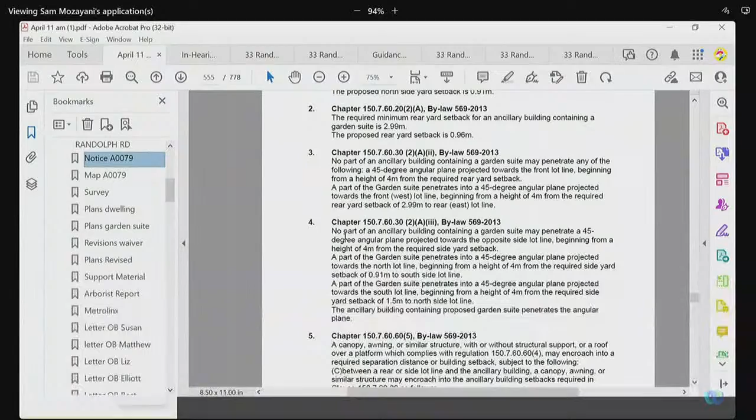I did have concern myself a little with respect to the use of angular planes, but to your comment concerning the neighbor to the south, which variance specifically would that relate to? So it's written as one variance. If we go to the public notice, it's actually written as the north and the south. We would just cross out the part of that variance that indicates the south. We would take that out. And then again, as it faces the neighbor to the south, he would have the angular plane as well as the separation that is well and compliant between the two dwellings. So I believe it is on number 4.

Yes, it is on number 4. It is the last, sorry, where it says a part of the garden suite penetrates a 45-degree angular plane towards the south lot line. We would remove that request. And then the only request for that angular plane would be on the north, which would front Rutherglen.

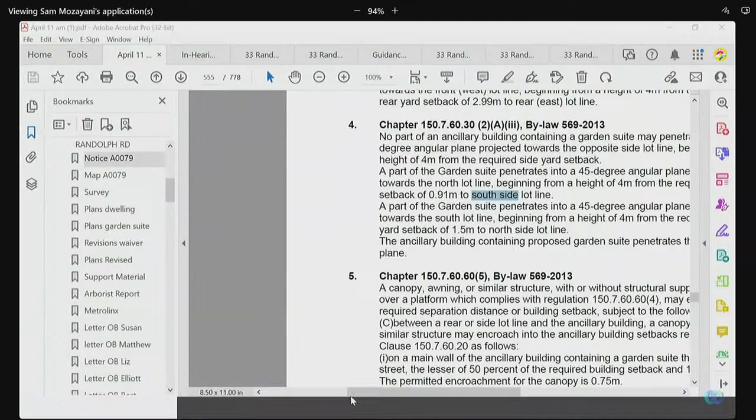I also ask, is it just based on, you know, I have a little bit of concern with respect to overlook and privacy to the neighbor to the south. He mentioned some potential privacy screening. The deck is actually away from them. That's actually, yeah, the walk out there. So, in terms of privacy and overlook, it just wouldn't be possible. It's the stair, actually. Correct. Any questions?

Correct, Mr. Chair. Do you want to clarify?

Through you, Mr. Chair, should we just clarify those variances? Because when I'm reading it, it's saying a part of the garden suite penetrates into a 45-degree angular plane projected towards the south lot line, but then at the end of it, it says the north side lot line. Could staff just clarify, does that make sense? And maybe the applicant too?

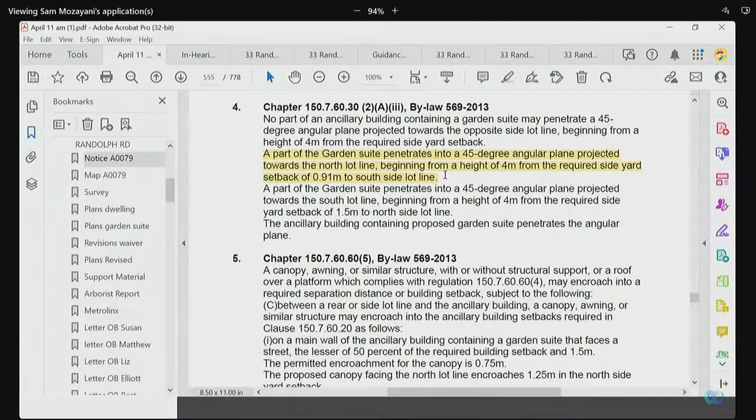Okay, any other questions? Any other clarification required? None? Okay, Mr. Binkowski, thank you. Can I ask a question? No, unfortunately not. Okay, we will move into committee at this time.

Mr. Reed: Chair, I think we could benefit from some discussion as a committee. I'll start with some thoughts. I think the main building itself is supportable. I think it's pretty sensitively designed, and there are a lot of very large houses in this neighborhood. So I don't have issues with the variances requested for that building, particularly as amended.

I think it's good to see some changes coming. I understand the neighboring residents' concerns about the garden suite. I did have a significant concern related to the angular plane, which has since been removed. I think that would have had a pretty significant impact on the neighbor at 31, but with its removal, I can support this application. I do think the sidewall relationship with number 1 on Rutherglen, with the increased setback from that rear lot line, the negative impacts on that house, because it's basically a blank wall, are pretty limited. So with the removal of the angular plane variance from the south lot line, I would support this application.

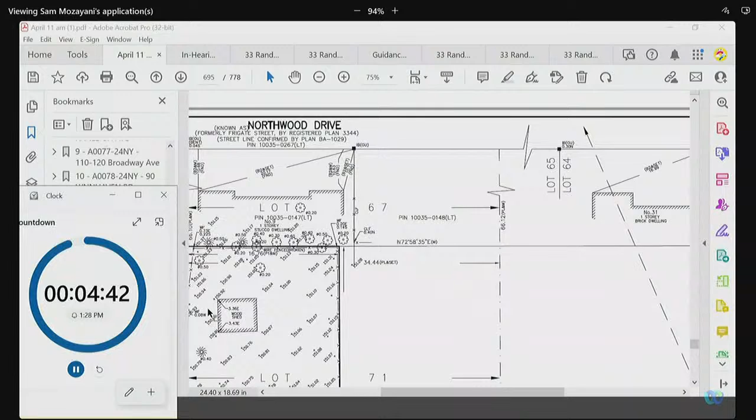So I'm here before you asking for 8 variances. This is designed for a multi-generational family who have chosen to live together: father, mother, and their daughter and her family. For this reason, we've split the house into 2 halves, one side for the older generation and one for the younger, so it's a total of 2 units. We had to make the house longer and deeper to accommodate everything - 2 living, 2 dining, 2 kitchen, etc. I've also noted several houses in the neighborhood with lengths over 20 meters and 1.5 meter side yard setbacks. I believe this meets the 4 tests and is keeping with the character of the neighborhood.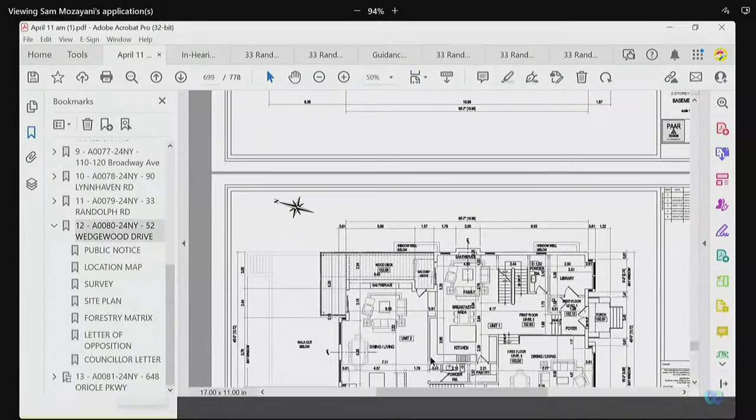It's noted that Councillor Chang, a neighbor, wrote in about our removal of 5 trees. Even though these trees are not bylaw protected according to our arborist, we have revised our proposal and sent this revision to the committee for review. We visited with the neighbor and wrote to Councillor Chang, who rescinded her letter, and we have opted to revise and shorten the walkout to save those trees. There's no staff letter in our file, and we believe the city does not object to our proposal. We are aware of the forestry letter included, so that would be a condition. At this time, we humbly ask for any questions or comments and hope you can approve our proposal.

Thank you very much for the brief presentation. I just want to confirm, are there any modifications to the variances? There are no modifications to the variances. The walkout wasn't a variance, but a couple days ago I sent in a revised site plan showing the revised walkout and how we can save those trees.

Let's pull up the site plan to make sure we're all looking at the same drawing. Just to confirm, is that drawing number A1 on the screen? Yes, that's correct, it's the one on the screen right now. Okay, very good, thank you. Any questions? No questions.

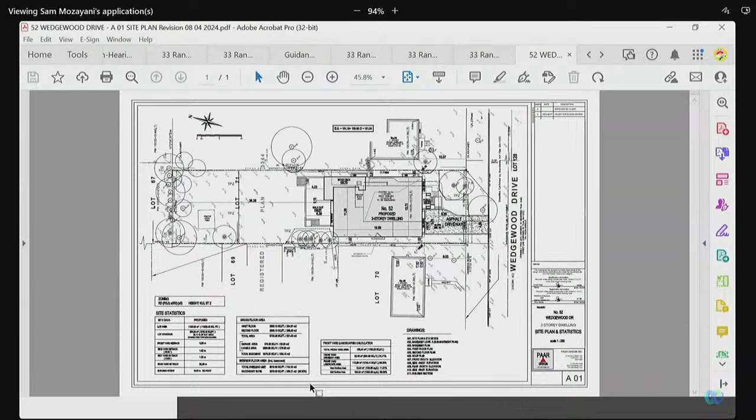We have, let's call up our other speaker. They're unmuted, Mr. Chair, I believe it's Amy. Thank you. Amy, are you with us? Hello?

Mr. Chair, I just tried to reach them and I got their voice message. Okay, if we don't have the other speaker, we're going to have to move on.

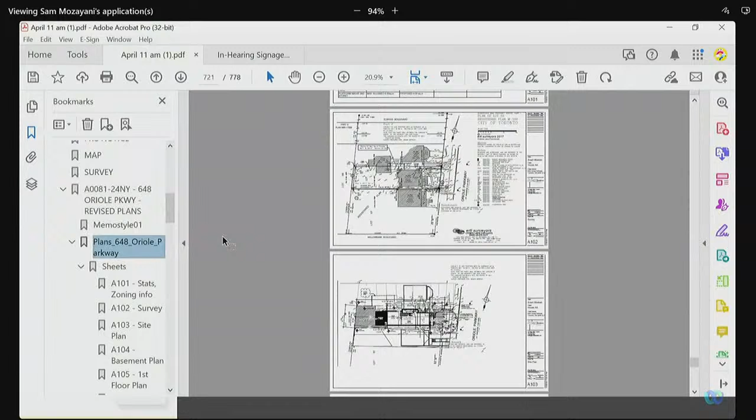Yes, okay, thank you. I'm going to start, this is going to be really quick. I'm going to start by addressing variance 2, 3, 4, which is essentially one variance. If you can kindly go to page 8 of my latest drawing, these three variances are triggered by raising the house by 46 centimeters or 18 inches to minimize my excavation. Go to the next page please.

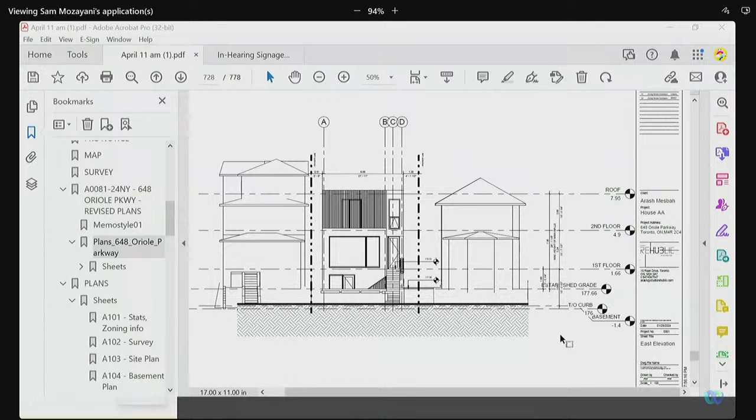I think it's the next page. Go back three more pages. Yeah, it's the east elevation. On the east elevation I've shown the immediate neighbors notionally, and I think my proposal sits very sympathetic within the two buildings. In terms of height, what I'm asking is well below the average height of all other approved variances on the street. We have precedence of 3 stories with 10, 11, 12 meter heights.

Variance number 1 is triggered by my attempt to get some natural light. If you can go kindly to page 12, sheet A111, the cross section. You can see the strange slope of my site that doesn't offer any opportunity to get natural light in the basement. That's why I have that light well in the front.

My wife and I work from home, and it would be a nice secondary entrance for our clients, so that they don't go through the house. I believe all requested variances are minor and in line with the zoning bylaw's general intention. I don't have any more comments, and I'm happy to answer any questions.

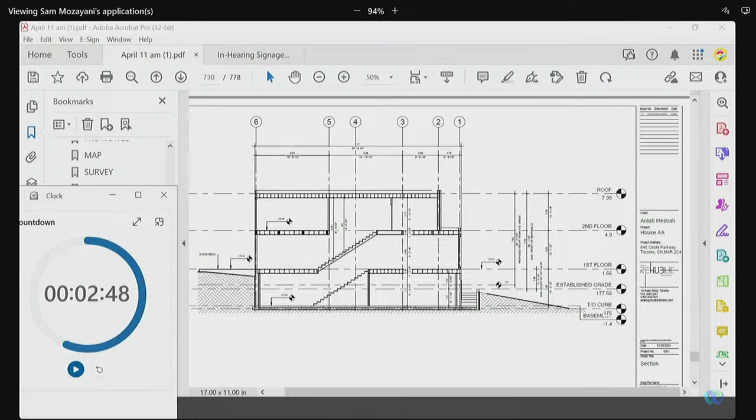Thank you, any questions? Okay, seeing as there's no questions, let's pull up our other speaker. Hi, sorry. Oh, hello, welcome. Thank you very much.

Presume you're Mr. Craig? Hi, Stephen Craig. My wife and I live at 652 Oriole Parkway, so we are directly north and adjacent to the applicant's home.

I'll start off with an apology. This is the first time I've ever been to a Committee of Adjustment meeting before, so some of my questions and comments may fall outside of your purview. If so, I don't mean any disrespect.

In addition to living directly north of the applicant's home, and we've been there for 38 years, as a matter of fact, we share a mutual driveway, and we also share a 50, 60-year-old frame two-car garage. So we do have some unique interests that might not apply to some of our neighbors.

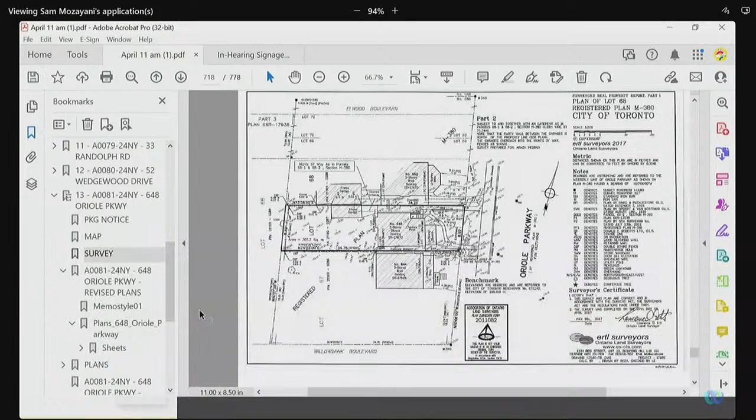I just had a couple of questions. One, I guess, procedural. I received your notice of public hearing. It was dated April 1st, and there was a site plan attached to it. I tried to muddle my way through what the site plan said, but I think I have an understanding there. And as I understand it, there was a revision to the application, and I dug this up through your portal, submitted on March 25th, which, and again, this is not my background, but it appeared the only meaningful difference was the treatment of our shared garage. But I couldn't tell if there were any other material differences between what had originally been submitted and what was subsequently revised on March 25th.

So perhaps that's a question that the applicant can address. I'm not sure. Another issue, and I'm sure this is outside of your purview, but I can't tell from the drawings whether the new residence will be encroaching in any way into our common driveway. I was out there with a tape yesterday, and it looked like we had 11.3 between our homes, and now it looks like it might be 10.3, but I might be reading the wrong number. So perhaps that's something that the applicant could address as well.

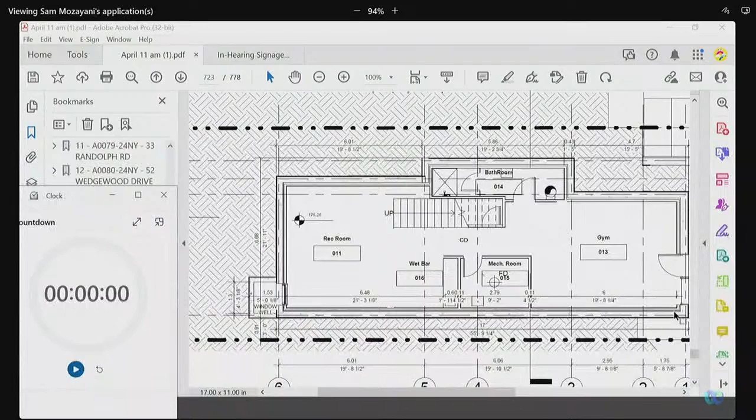I'll circle back to my third point about variance number 1. I've lived on the street for 38 years, and I don't think there is a home on the street that has that kind of access - a set of steps going down at the front of the home. Typically it's at the back or perhaps at the side. In terms of consistency, it's just not consistent with other homes on the street. I wonder if there's the ability to revisit that and perhaps access the lower level from the back of the house.

Okay, thank you. I'm going to take all of these good questions you put forward, and we're going to ask the applicant to address that. Thanks very much for your time. All right, so if there's no other speakers, let's bring the applicant back.

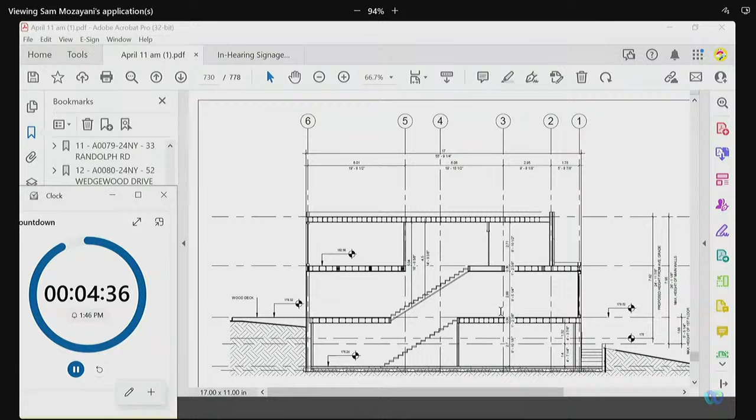So the first point was the revision on the parking garage. That was just me having difficulty with my budget, going back to the drawing board, and realizing that I have to basically maintain my neighbor's portion of the garage. The second point was the encroachment into the driveway - I'm not encroaching into that easement. That easement asks for a 1.24 meter clearance, and I'm complying with that.

Variance number 1, yes - because of the strange nature of the property, the land, the grade is negative, sloping down toward the street, so it's going to be really hard to have that set of stairs and the light well in the backyard. I'll point out that front light well is not visible from the street. And I'm doing all of this - going through a huge challenge just to save the tree in the front.

So if you look at other buildings on the street, they removed their trees, dug out the front, and they actually have an integrated parking garage in the front. So I'm keeping a nice landscape in the front, but at the same time I'm trying to get some light into the basement.

About the parking, yes, I removed my parking, and transportation has no objection about that, and I'm not planning to park my car in the backyard. I'm thinking to go carless. This area is very close to public transportation, and I'm planning to use public transportation to go to work most of the time.

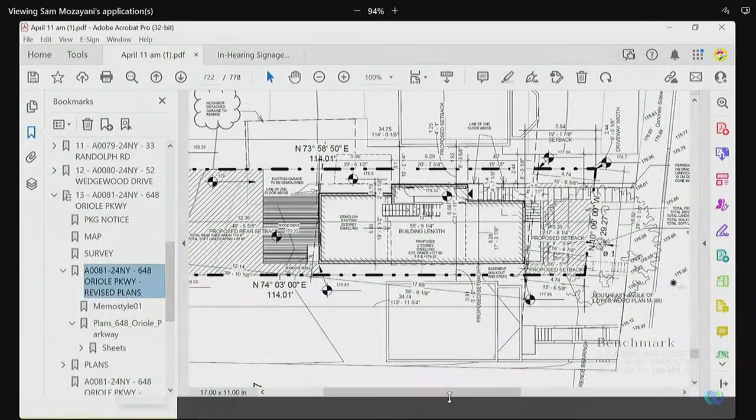Okay, so just to address one of the questions brought up by your neighbor with respect to the right-of-way - so you are obviously maintaining the right-of-way in its entirety. Yes, that's true. Now, just to address the garage at the rear, it looks to be one building that's sort of split in the middle.

So is it your intent to tear half the building down and then reconstruct the sidewall adjacent to the neighbor? So I have two, basically three scenarios that I'm exploring right now, and my neighbor Steve knows about them. One was to replace - tear down the whole thing and replace his garage - and the other is to basically maintain his portion of the garage, by cutting my half of the garage and coming up with some sort of support system on my side of the property.

You realize you may have put yourself into a bit of a difficult situation with respect to this garage and how to go about it, because it does appear to be very much a common building that straddles the property line and is shared between both sides. So that may take its own kind of set of planning with the neighbor.

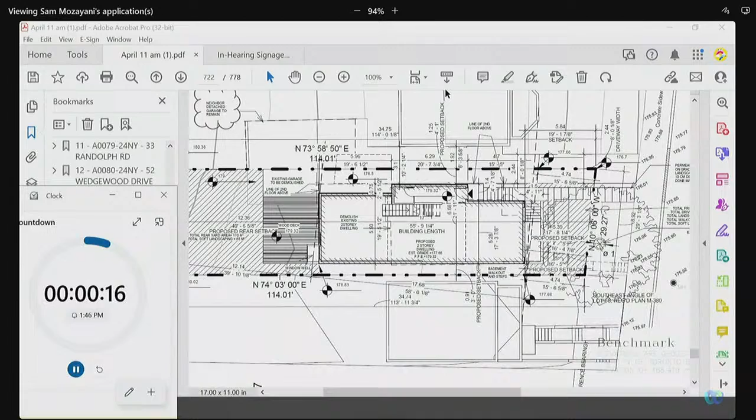Any questions? Can I ask a question or no? No, unfortunately not. If my colleagues have any additional questions, I will allow them to ask.

No other questions? I realize it does present a bit of a unique circumstance, given that there is a shared building between the two properties. I don't know if there's any comment with respect to that.

I had a small comment with respect to the secondary entrance at the front. I think the intent is to mitigate the visual appearance from the street, since these buildings should really have one entrance. So the question is whether that secondary entrance is mitigated in terms of sightlines. I did have concern with respect to the adjacency to another street which faces it directly. The property is quite visible, not only from the subject street it fronts, but from the street it intersects.

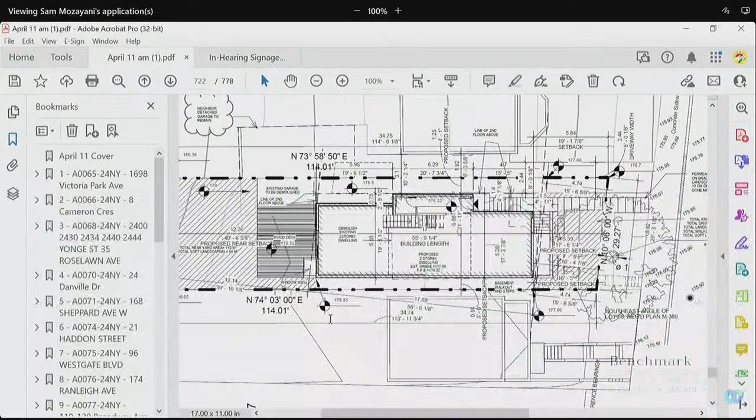Can you, if I may ask, pull up the drawings again, the front elevation, east elevation? Yes, that one. Can you zoom in, please? Yeah, very good, okay, thanks. So you see the steps going up to the front door, the main door, and then to the left.

You basically see a guardrail, just guardrail, and then a little bit of the opening. I recognize the guardrail isn't represented on the elevation drawing, but there probably will be requirements for some form of guardrail across the front. Yes.

And then there is going to be a big tree in front of it, so you don't actually see any of it. I don't know if you guys have looked at the tree - it's like 1 meter in diameter.

Any other questions? I'd like to take us into committee now if there aren't. Mr. Reed. Just one, Chair, thanks. If the applicant could talk a little bit more about the garage - I understand there are solutions being explored now, but it would be nice to understand that the neighbor's going to be made whole, or this will be taken care of. If he can give some assurance to that, to the committee, please.

Of course. I think I've been doing that so far - the past 6 weeks I've been going back and forth with my 3 engineers, and I got a stamped drawing submitted to him to get his own engineer to review it, and obviously this is going to go through the building department, so it'll get reviewed by the examiner. I have no intention, by removing my portion of the garage, to jeopardize the integrity of his garage. Great, thank you.

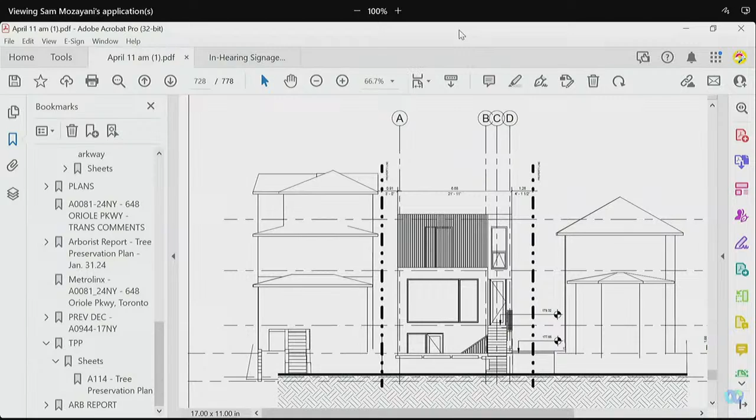Mr. Reed: Thanks, Chair. I can start with a couple comments. I think this is a really good application, quite restrained in terms of the built form it's proposing - not a huge expansion over what's there. Regarding the front staircase, I hear the applicant's point that screening is provided, and also these lots are a bit elevated from the street, so that breaks up the visual impact. I don't have big concerns related to that. And I'm glad to hear the right-of-way is being protected and the garage situation will be remedied. So I support the application.

And if my colleagues have no further comments, I'm happy to move a motion to that effect. I moved it. Yes. I move approval of the application without condition. Second by Ms. Casson. All in favor? I will dissent on this one. So we got four in favor. The motion carries. The application is approved.